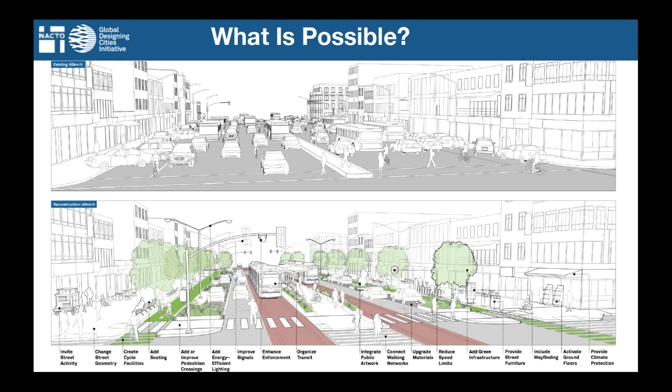But what's even more critical is that we challenge the spaces we already have and that we demand more of that space to serve more of our population.

Instead of taking a functional classification approach to our streets, where we basically choose if we have an arterial or a connector or a local street, instead we take a people and place approach to street design in the Global Street Design Guide.

We demand that every street design look at the desirable outcomes of proactively supporting healthy and safe environments, of livability and quality of life, of access for all modes of transportation, looking at how the designs support environmental and economic sustainability, and of course how we can do that in a fair and equitable way.

We have 10 core design principles in the Global Street Design Guide. We start, as I mentioned, with our most vulnerable. We make sure that our streets are safe and that they must promote healthy environments.

We remind ourselves that our streets are public space. They're public space. That means they belong to all of us and we all have a right to be there.

Our street designs play a fundamental role in the ecosystems of our cities, that they must be multimodal and make sense for the context that they're situated in.

We know now more and more evidence that great street designs support great businesses. And we have to remember that we don't experience our streets in plan or section like we often see them in drawings, but as human beings we experience them in real time with all of our human senses.

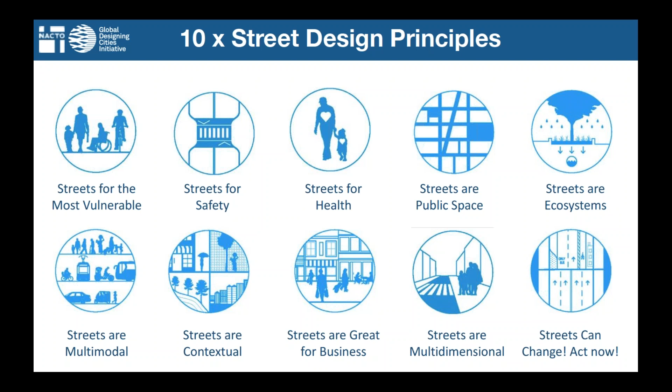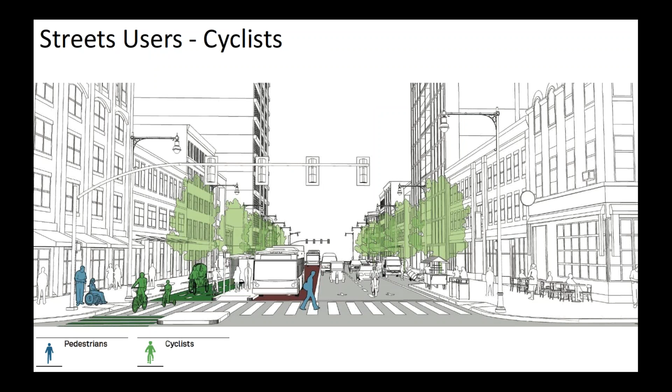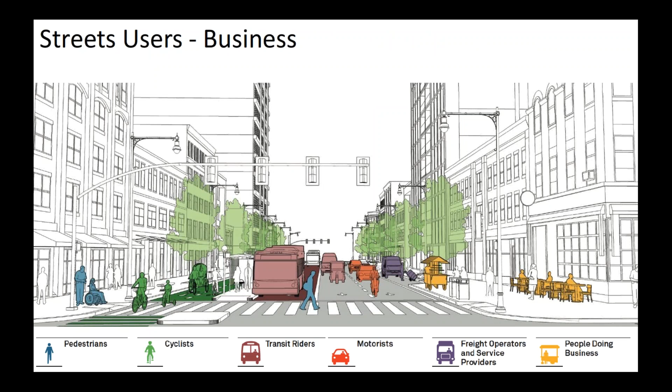When we look at designing for people, the Global Street Design Guide breaks down the needs of all the different users, from pedestrians and cyclists to transit riders and private motorists, to those operating freight and moving goods and delivering city services, and as we mentioned, for people doing business.

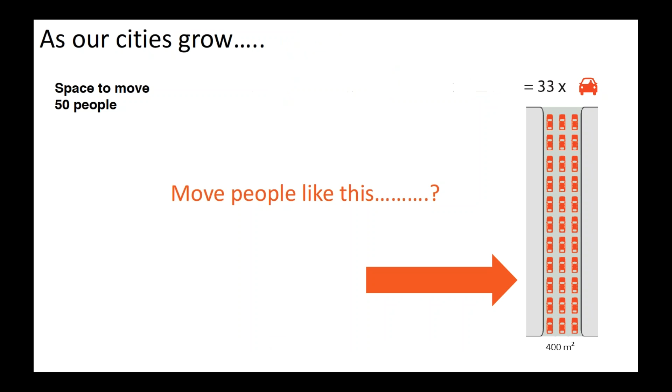Most of you have probably seen diagrams like this, where we look at the amount of space taken to move 50 people. And as our cities are growing and expanding, we have to ask ourselves, do we want to move 50 people like this, or do we want to move them in a multimodal approach?

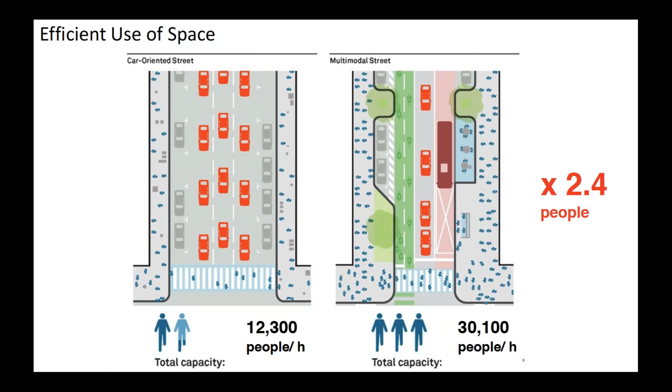One of the diagrams in the Global Street Design Guide shows the very same space designed two ways: one for a car-oriented street moving around 12,000 people an hour, or as a multimodal street where we can move almost 2.5 times as many people in that same space. So it's very logical, the numbers all align, that we really have to make more efficient use of our street space.

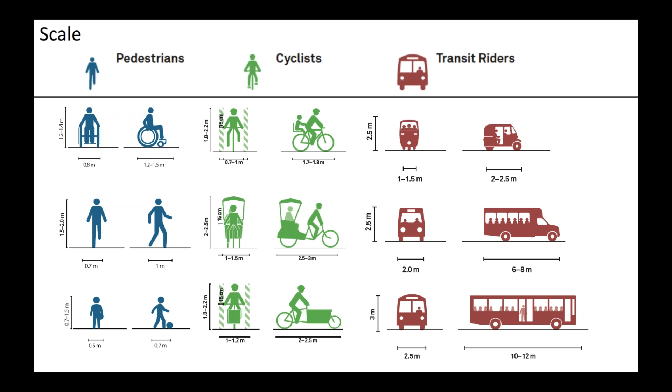So the Global Guide, I'll just go quickly to give you a taste of what's in there. We touch on the scale of all our different users and have the person in the wheelchair as our design vehicle for our streets, not the vehicle moving the private car.

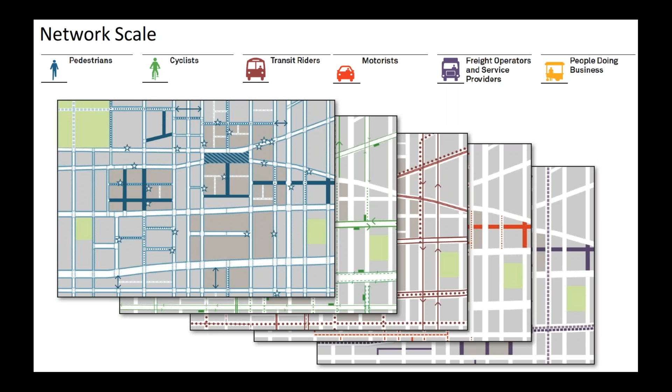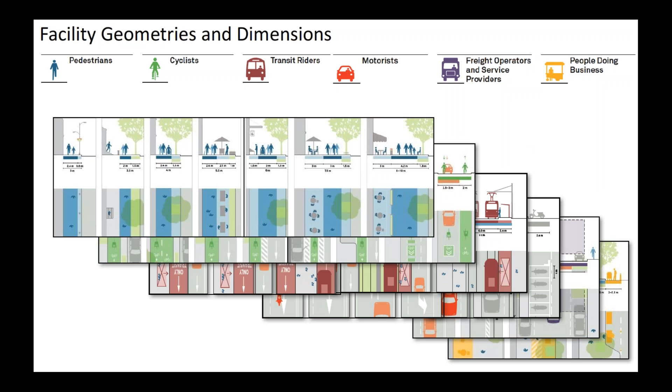We take each of these sizes, but we also look at the larger scale: what does it mean to create a continuous, safe, and comprehensive network for each of these users, making sure they're comfortable and have access to the city. We look at the different facility geometries and basic dimensions for each user, and break down what makes sense for different parts of the city in different contexts.

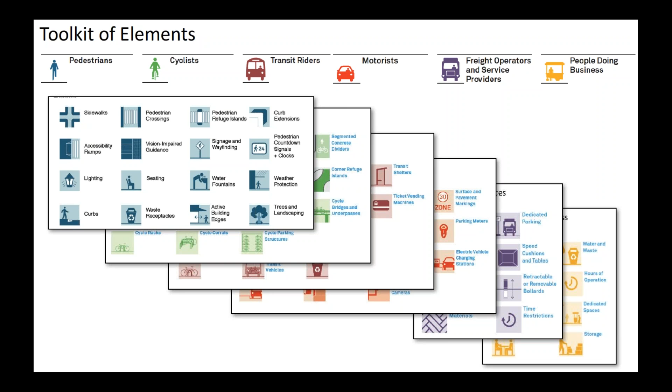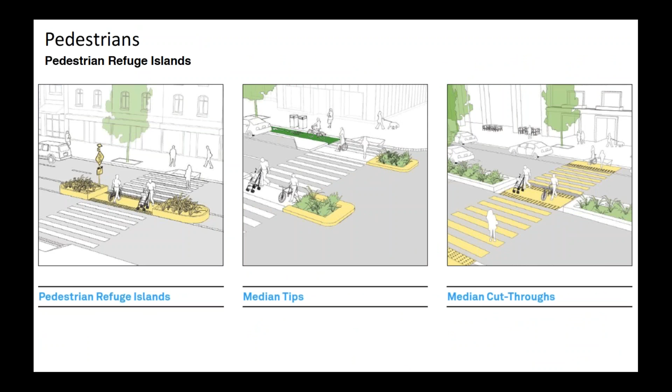Beyond this, it's not just one piece of infrastructure, but a whole toolkit of elements that need to be provided for each of these users to create a comprehensive, enjoyable, and safe experience. The Global Guide also touches on other pedestrian infrastructure, like crossings, refuge islands, and curb extensions, thinking about how we can reuse space and shift it from one user to another.

When we talk about designing for place, it's critical we think not only about the built environment, but also the natural context we're working in, the local social and cultural context, and the economic environment that informs each and every design.

The Global Guide has a series of regional context considerations, from looking at demographics and density to the larger street networks and block sizes, making sure we take into consideration geographical features and vulnerability to natural disasters.

Then we look at the immediate context: what's the detail of the street activity at each stretch or block? Where should the street furniture go? How do we maintain a human scale within the right-of-way? And how do we think about the edges of our buildings so they're transparent and have frequent entrances to keep active, safe, and engaging environments?

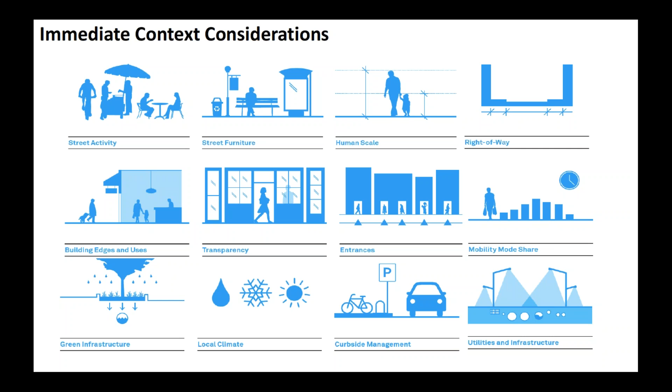How do we think about the local climate and opportunities for green infrastructure in each and every street? It's fundamental that we remind ourselves that we can't just have one street design and apply it along an entire corridor. As the context changes, so must our designs.

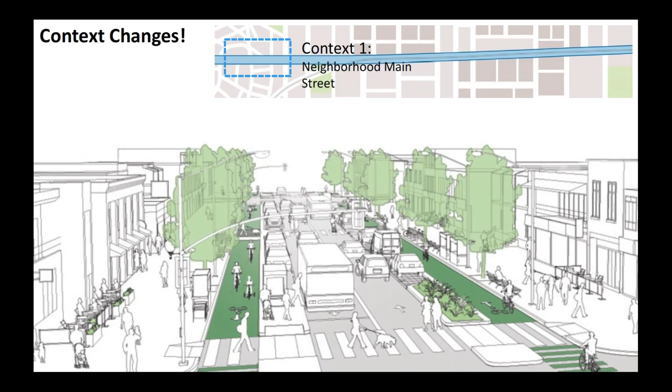So we see an example here where one street is like a neighborhood main street, but a few blocks down the road, maybe a new transit system has entered the network. The density has changed and the land use has changed, putting different demands on the street and therefore demanding different design decisions to reflect that.

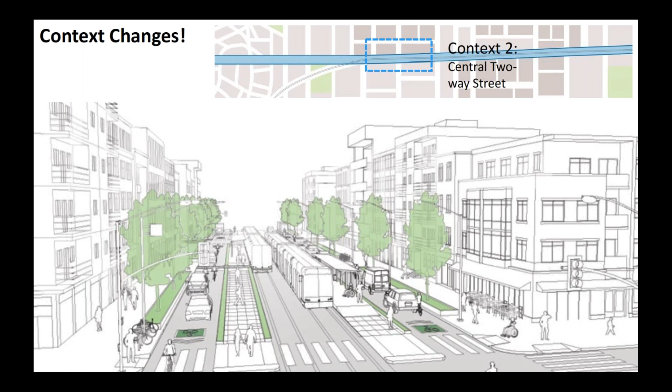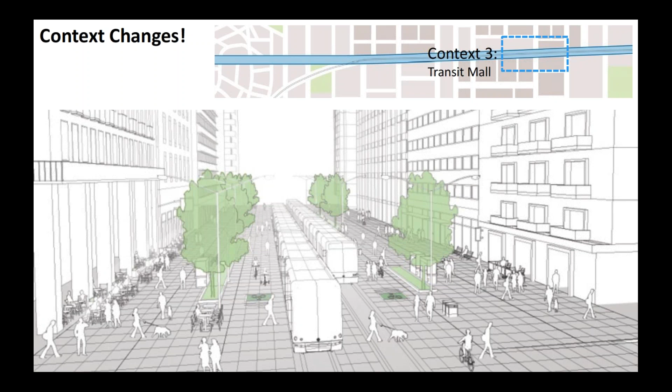A few blocks further down, in this case in a dense urban area, we see the same space transformed into a transit mall, with dense areas, a lot of people, and high volumes of pedestrians putting the need for that space to prioritize transit and people.

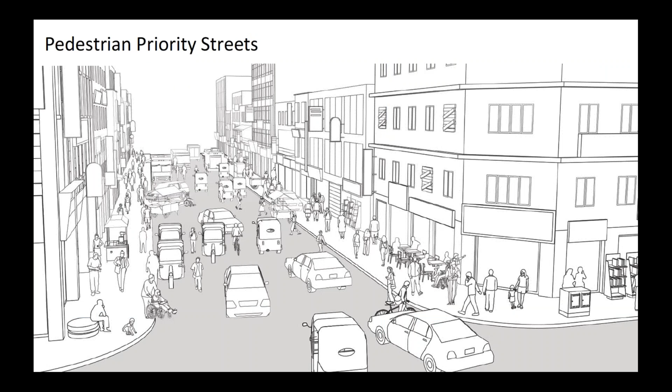A big part, as I mentioned, is around street transformations in the Global Street Design Guide. There's almost an infinite number of street typologies, but we focus on 5 key types: pedestrian priority and shared streets, neighborhood streets, large streets, and then of course the things that don't quite fit, which we put in special conditions. We've taken examples from our network all around the world and abstracted these into 3-dimensional models.

We take the types of conditions we find every day, where sidewalks are blocked and chaotic street environments make it unsafe and unpleasant for people, and show what's possible and how these can be transformed, like this example of a pedestrian priority street.

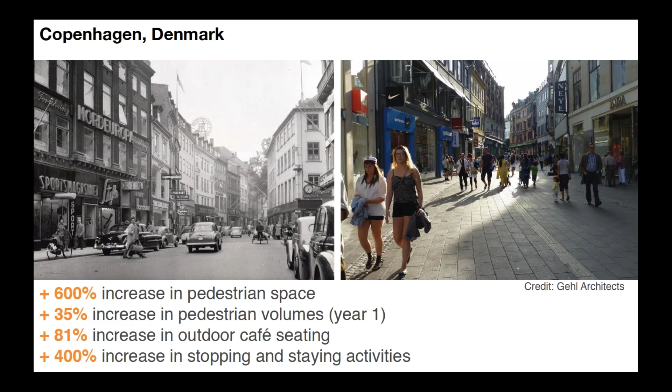Similar to the example we heard this morning from Copenhagen, we also collect metrics from real-life case studies. Here we show a huge increase of pedestrian space and pedestrian volumes, and in turn a huge improvement in the amount of space for stopping and staying activities, as well as outdoor cafe seating.

Kind of similar to this one in New York City, where this transformation with the addition of protected cycle infrastructure saw not only a decrease in injuries but in pedestrian crashes, a decrease in overall speeding, and at the same time a huge increase, 49%, in retail sales.

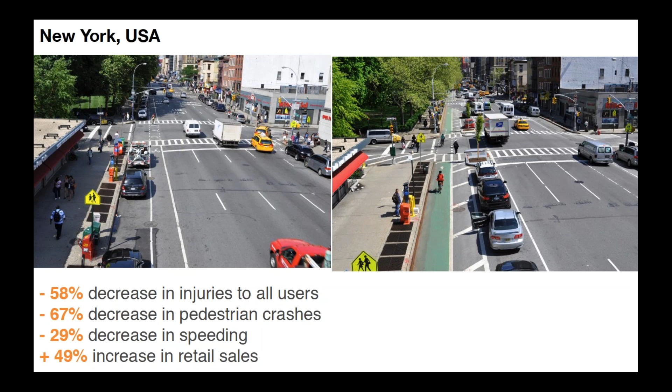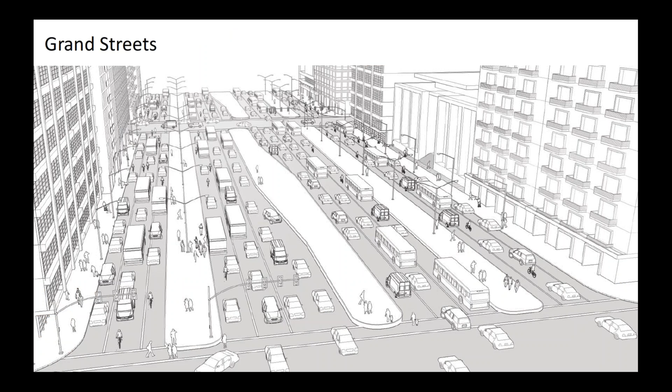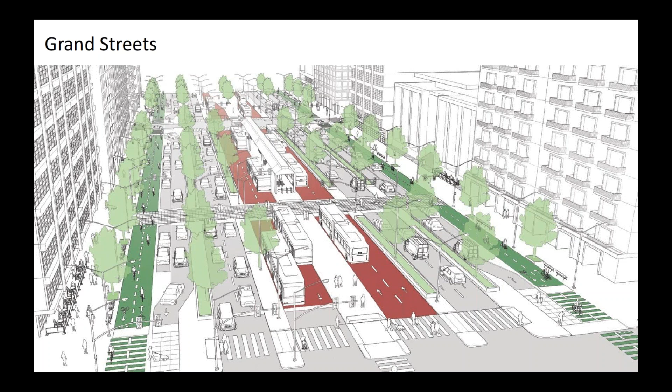And then large, grand streets like this one, modeled off an example from one of our case studies in Argentina, where we show how this can be transformed to much more efficiently move people safely, with dedicated space for cyclists, multiple lanes, and BRT in this case moving in each direction, yet with at-grade crossings for people to safely connect from one side to the other.

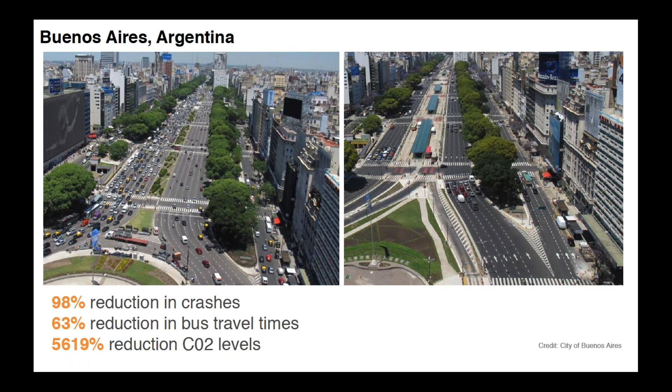And here in Buenos Aires, we saw this one example with an almost 100% reduction in crashes, a huge reduction in bus travel times and moving people more quickly, and a wonderful improvement in air quality.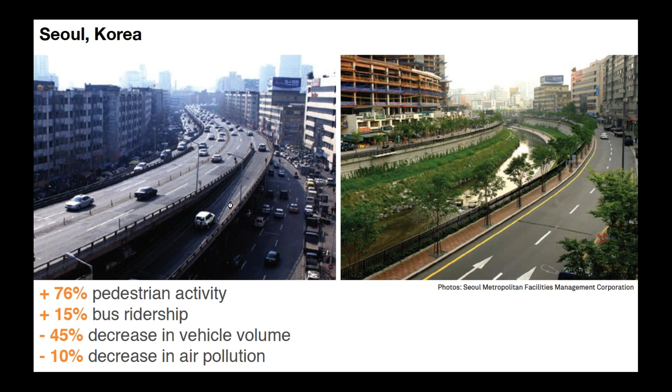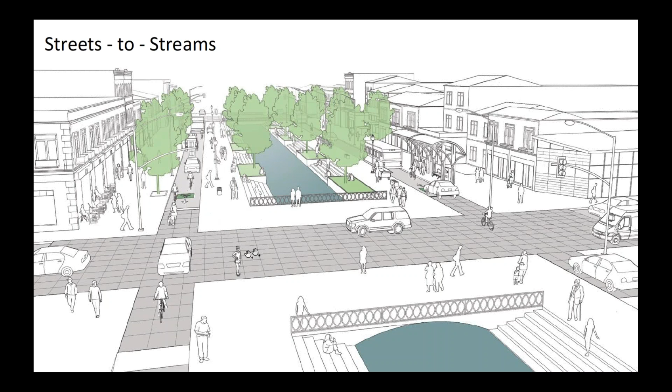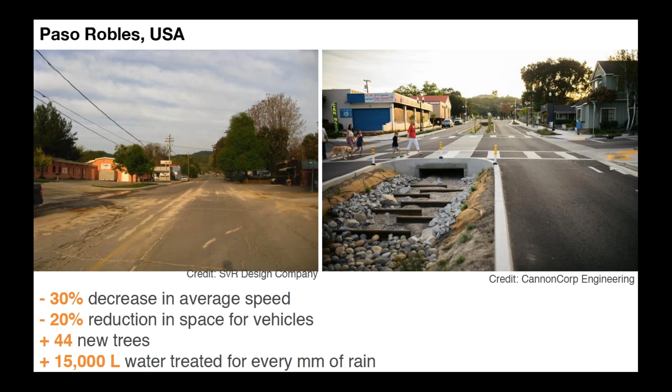So often we took complete disregard for our natural context and paved over our streams and rivers. Now with Streets to Streams, we're showing how these spaces can be unveiled or revealed to again provide a new heart to a community instead of dividing them. A bit like in Paso Robles, California, where we not only saw a decrease in average speed, but new trees helped to improve water treatment.

We have a chapter on intersection transformation showing examples where raised intersections can be added to slow vehicles and provide at-grade, safe, accessible crossings for people in the street, a bit like they've been doing in Fortaleza in Brazil just this past year, with this one showing a mid-block crossing.

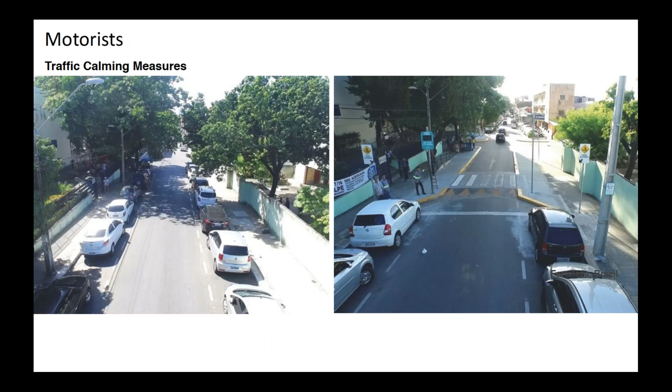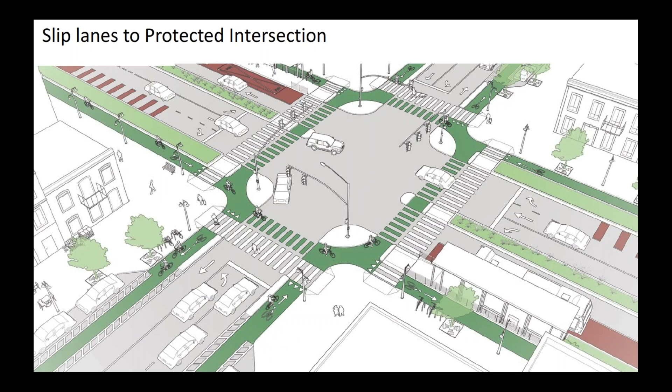Or how slip lanes that invite vehicles to move at fast speeds can be redesigned to provide protected areas for cyclists and more space for safe crossings, green infrastructure, and transit facilities, a little like has been tested in this example in India, with cones and chalk where the space can be rethought and tested.

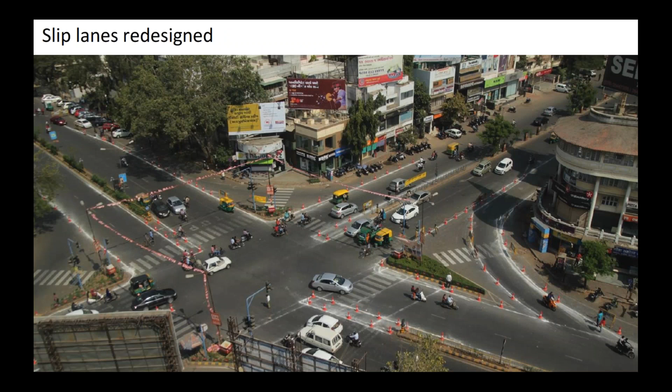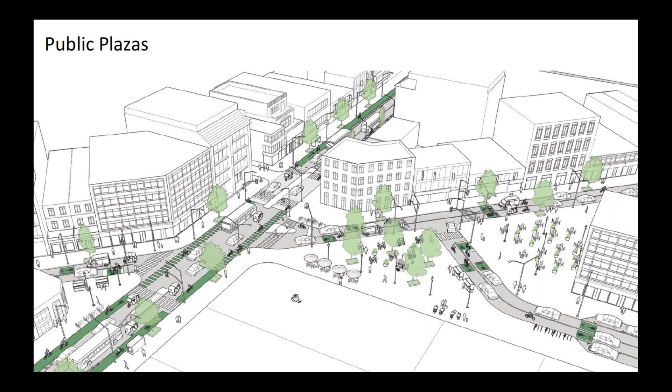And one of our favorites, public plazas, where we see geometries coming together at crazy angles, and underutilized space that's being used to store cars rethought and transformed into places for people, drawing from examples in Buenos Aires, Argentina, to New York City, where we see car parks transformed into plazas.

And of course, one of the most famous ones, Times Square, where the closure of one of the busiest intersections in the world saw an increase in ridership for buses, with almost three-quarters of people preferring this. We saw an overall reduction in crashes and, once again not surprisingly, an improvement in air quality.

Now, there are over 20 case studies from all around the world in the Global Street Design Guide that we invite you to take a look at.

We also touch briefly on process and metrics, understanding that people have a different role to play at different parts of the process. So we touch on everything from engaging stakeholders and analyzing the site, through project implementation, to make sure we're looking at ongoing maintenance and management, evaluating the impacts, and constantly looking at how we can update our policies.

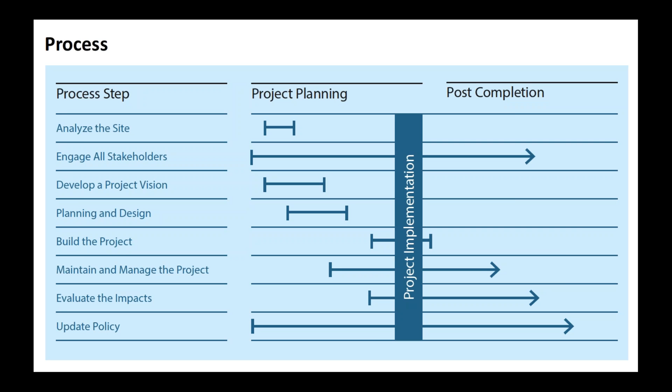We look at who's involved in shaping streets and how we get the right people to the table, identifying what each of these stakeholders care about, what their interests are, and how we can work them all in together. And when we talk about measuring and evaluating the street, we have three primary areas: we look at the physical and operational changes of our street.

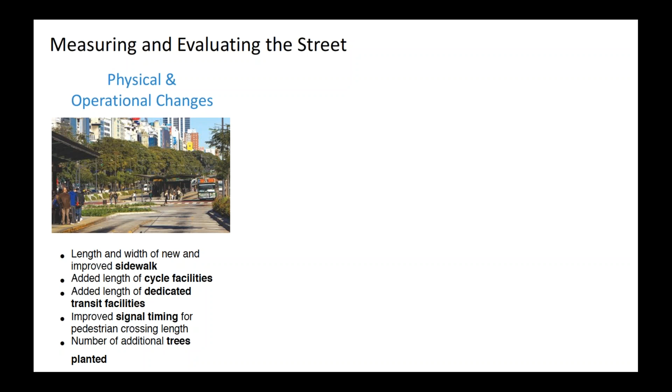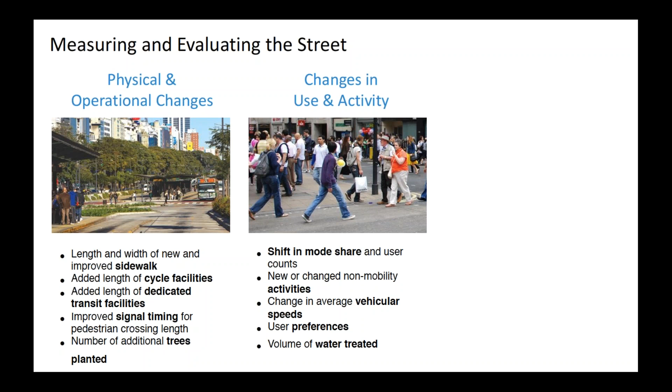So can we add new sidewalks or new cycle facilities? Can we improve the signal timing for a crossing or add new trees? And how do these physical and operational changes have an impact on how people use the street or the activity that occurs there? We need to measure: if we add more cycle facilities, are we getting more cyclists? If we widen the sidewalks, are we having less people walk in the roadbed in an unsafe manner? And of course, the long-term resulting impacts of making sure we're working towards better air quality, fewer deaths on our streets, and overall healthy environments.

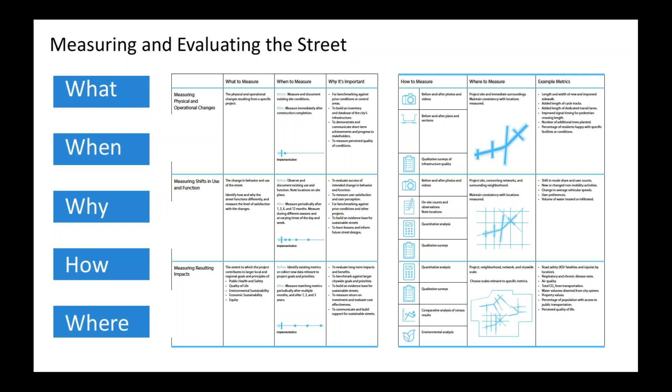The Global Street Design Guide touches on the what, the when, the why, the how, and the where, to help people measure these for the projects they're working on in their corner of the world. At the same time, we're developing metrics and sheets that will eventually be on our website, so people can take these and use them to measure the projects they're working on.

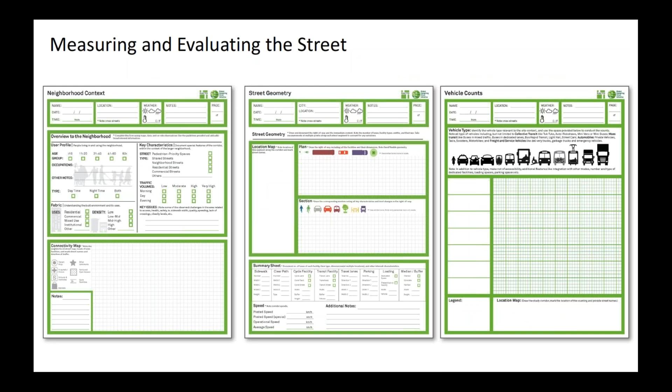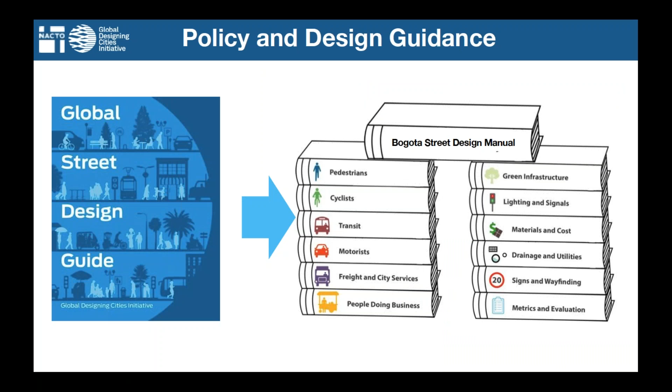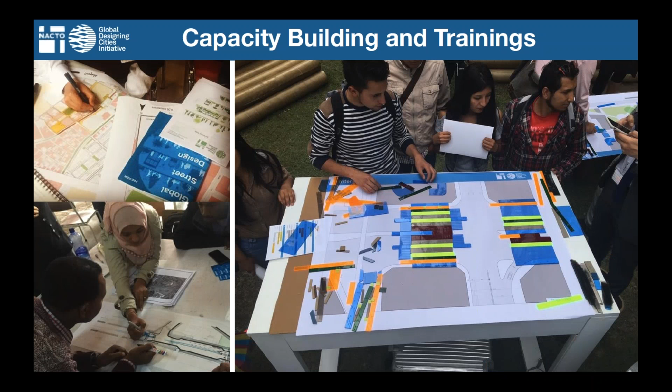To give you a tiny taste of how we're applying some of these strategies in the 3 cities we're working in, we're now using the Global Street Design Guide to inform policy and design guidance at the highest level in city governments. We're trying to make sure local staff in these contexts can come to trainings and build capacity in the local staff and the consulting and academic institutions, whether that's through a traditional presentation space or more hands-on with puzzle pieces.

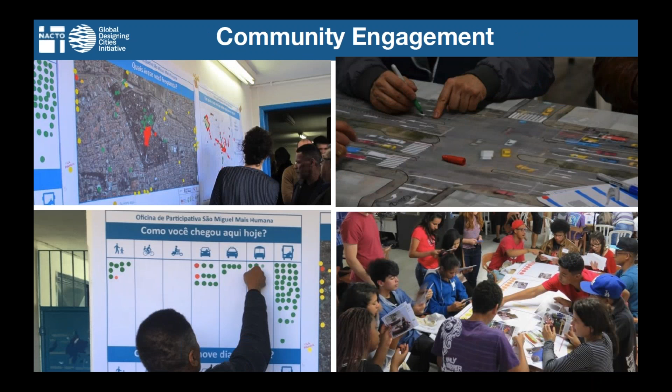We do community engagement, knowing that the locals, the residents in a neighborhood, are the experts of that space. We want to know from them how they move about, where they feel safe, and which strategies they think make sense for them. So this is a big part of the work we're doing on the ground.

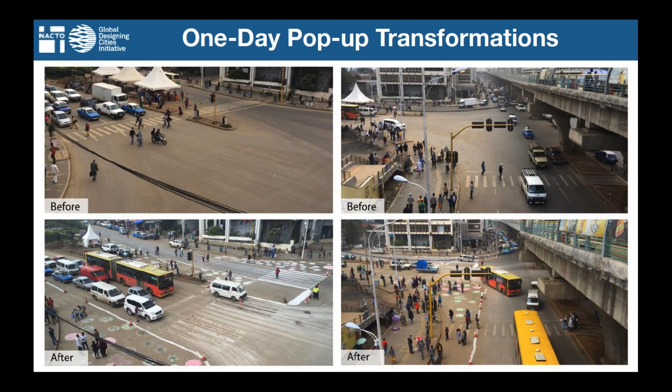We're doing one-day pop-up transformations that help people look, see, and feel a different alternative for the streets that they may have never had the chance to previously imagine. This one in São Paulo, Brazil, or here in Addis Ababa, Ethiopia, where we went out and used chalk and planters, and in one day were able to take the chief engineer and show him that a bus could still make that turn, and it was okay to reclaim those corners, to shorten the crossings, and to give them back to pedestrians.

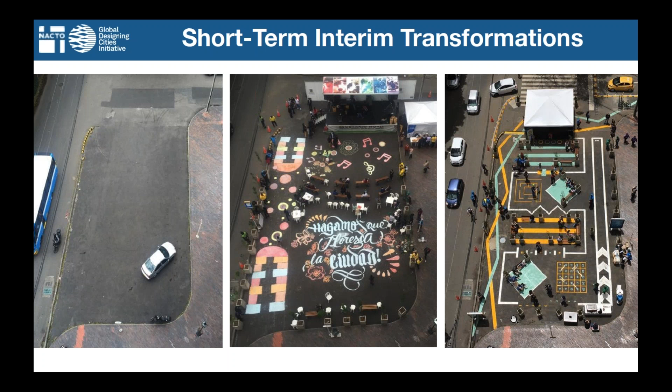And sometimes these pop-up events help us work towards longer-term interim transformations. Here, a plaza in Bogotá, where a car park was transformed in one day with a local artist and performance. Then we collected metrics, and went back and did this with the city of Bogotá in paint. So it's now there for 6 months, and we're measuring the impact of it.

And we've just done the same thing with the chalk project you saw in Addis Ababa—we went back last weekend actually. A week ago today we launched this in Ethiopia, where we worked with a local arts college, and we redefined and redesigned this large swath of asphalt into a more pedestrian and human-friendly space.

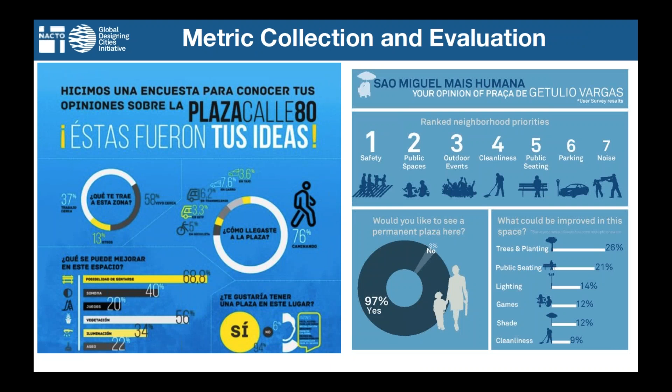And as I mentioned, we're collecting metrics and evaluating these, taking the outcome of these projects to understand what works and what doesn't, and to make sure we're improving our ideas and our designs along the way.

So we officially launched this new resource, this new baseline for designing streets around the world, last month in Quito at Habitat 3, and we're now embarking on an endorsement campaign for cities and organizations around the world. So please reach out to us if you're interested.

We've had a wonderful time so far. Sorry, I've lost the presentation.

We've already had advanced praise from many wonderful leaders in the industry, and many of the mayors here, from ex-New York to Paris and Rio to Mexico City, to Sydney, and to Santiago.

So we hope that this new resource provides the tools for you to reimagine, reinvent, and redesign safer and more sustainable streets in your context.

Our challenge to you is to write about it, to ask for it, to demand it, and of course design it. For those of you that have the money, please fund it, and ultimately just do it, to fight for streets that put people first.

And so collectively, we can each work towards changing streets to change the world. So thank you.

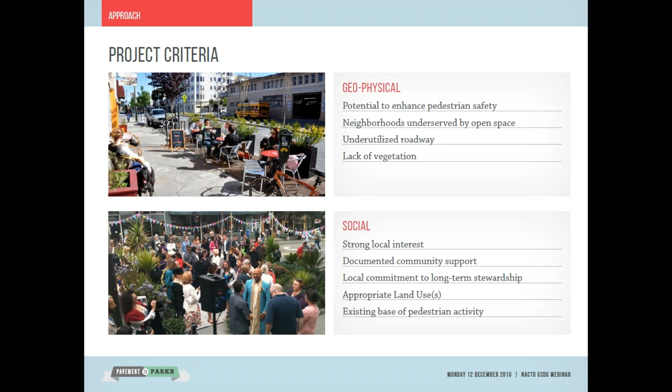We are happily, I think, overwhelmed with requests, so this also helps us be really focused and strategic about where we can make the most impact and have the most change.

So we would like to illustrate briefly a couple of examples of work.

The first project, which is actually included in the design guidelines, is Persia Triangle. This is a project we decided to work on in the Excelsior neighborhood, a pretty diverse neighborhood in San Francisco along one big transit corridor, Mission Street. The triangle is a triangular area where three streets intersect: Mission, a very high transit and commercial corridor, and two smaller streets, Ocean and Persia.

This project started a few years ago, in 2013, and we began meeting with the neighborhood. The neighborhood approached us together with the office of the district supervisor, John Avalos. We were asked to look at this corner, which from just a superficial look seems like a nondescript corner with a big car repair lot in the middle of it. We would never have considered it if the community hadn't approached us to request that we look at it.

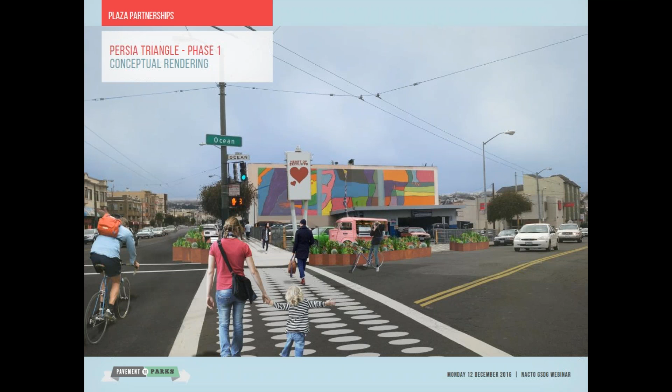I'll leave time for questions at the end, but we'll move on to the second case study now. Great, thanks Ilaria. We'll quickly cover another overlooked and underutilized place—or formerly underutilized and formerly overlooked place.

This is Annie Alley Plaza. Annie is one of the tertiary alleys we have throughout our downtown, so it's a very different land use context than Persia, which we just looked at. That was in one of our more outer neighborhoods, a bit more of a suburban condition, whereas this is right in the heart of downtown.

It's in Supervisorial District 6, which has the lowest per capita open space of any district in the entire city.

This is what Annie Alley looked like for many years—one of those back alleys you'd find in any downtown in North America and many places in Europe. We have a tiny pedestrian facility; 90% of the right-of-way is given over to vehicular circulation. This photo was taken in the mid-afternoon, and it's not even well used by cars, since peak usage by private automobiles really only happens in the morning and evening.

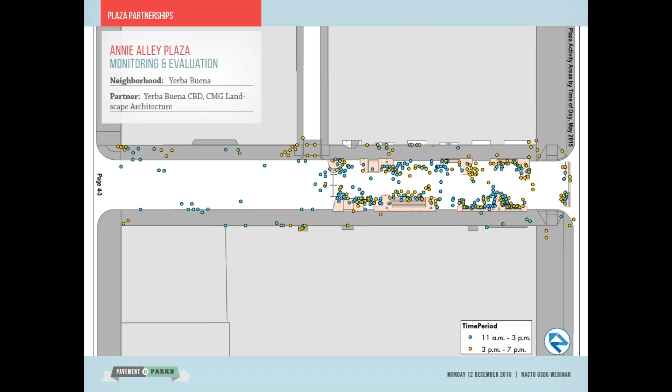And so we were really happy and pleased with this as a demonstration project for San Francisco, and a temporary intervention for making change in our streets.

We just wanted to touch on a little bit some of the types of analysis and observation and evaluation work that we do. Part of Pavement to Parks as a program is something that we call the Pavement to Parks Research Lab, which is a whole venue for independent researchers, either from academia or resident interns that we have here at Planning, to conduct evaluation and research work on our projects and our program.

So we had a great resident intern here for a year, Jean Stroman, who did an extensive study of this space, adapting a lot of the methodologies that William Whyte and Gehl Architects have used over the years to just really understand where people were over the time of day, what kinds of activities they were engaged in, what kind of postures they were taking, how they were engaging with the fixtures that were provisioned.

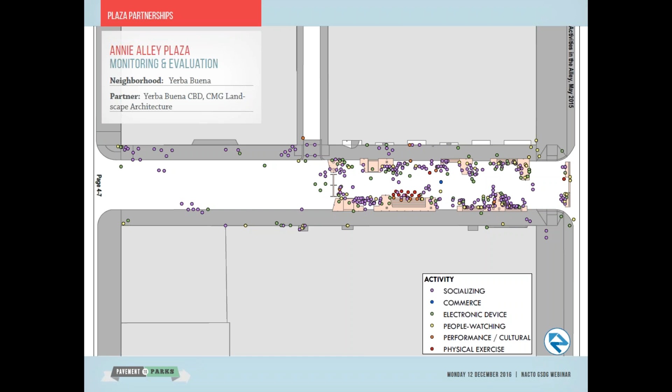And this is really helping us think through the potential next phase of Annie Alley. This installation, as you've seen it today, was actually de-installed this past fall. The Community Benefit District is reconsidering when in the near future they might do another version of the installation, learning from what we learned during its two-year life cycle.

I just wanted to note that Pavement to Parks helps to facilitate temporary public spaces, experimental public spaces, and sometimes, not often, those spaces are, in the case of Annie, de-installed for a time or reconfigured. And that's part of the strength of this approach, I think, in that the investments that are made, the demonstrations that we do, can also be context responsive and situationally responsive.

So for example, you'll see here just in this diagram that the Jessie Square Garage, which is a huge parking facility some blocks away, actually had some of their exits closed to facilitate the construction of a museum. The local Mexican museum is currently under construction on that block.

As a consequence, there's only one way now that patrons can exit that facility, and that meant that in order to alleviate some of the drastic impacts, it was part of the rationale for Annie, this version of the installation, being removed for a time.

This particular alley is actually being looked at as part of a larger environmental impact report, an EIR, for the larger district as part of our Central SOMA plan. It's one of the many tertiary streets that are identified for closure and being analyzed through an environmental lens for their potential long-term impact were they to be closed.

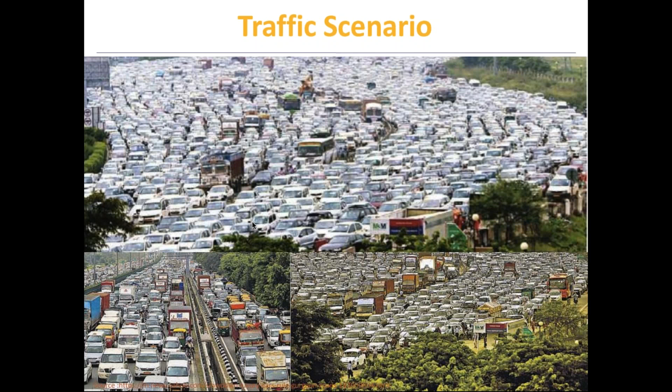Thanks, Amit. I think our previous presenters have already said why we need this concept, and why we need to design the streets for all. So this is Indian streets - basically this is Gurgaon, where we have this 16-lane wide road, and this is the everyday traffic scenario, which is full of cars.

And road safety - as already described, with the statistics about it - India is number 1 in road fatality. 0.14 million people die every year on Indian streets, and 70% of them are pedestrians and cyclists. So basically, we started this whole Raahgiri to reclaim the streets for pedestrians and cyclists, ensuring their safety and taking this message to the decision makers about why they are important in the streets.

Then moving to air quality - everybody knows India is number 1 in bad air quality, and we have 0.62 million premature deaths every year due to bad air quality. And this bad air quality is just because we are planning and designing our streets in a basically car-oriented way for our cities.

Physical inactiveness causes 0.43 million premature deaths every year, just because of the car-oriented culture we have adopted, sitting in the car, going to office and coming back. There is no physical activity because of a lack of public transport and no infrastructure for pedestrians and cyclists. So even people willing to walk or cycle can't. As the famous statement goes, building flyovers or widening roads to solve traffic congestion is like loosening your belt to fight obesity. We all have to go on a diet, from designing streets for cars only, to dieting from cars.

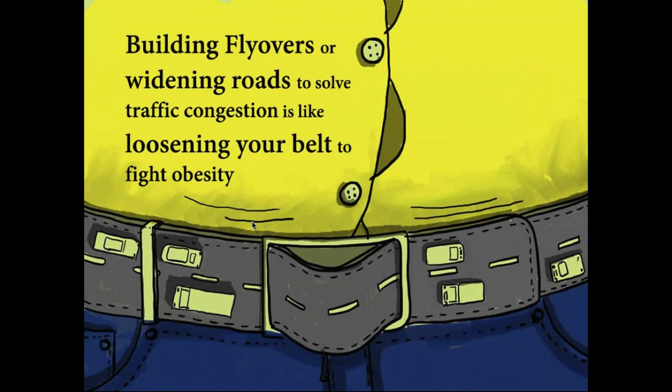The whole agenda behind it: whenever we talked about cyclist and pedestrian safety, decision makers say, who cycles or walks? Everybody here has cars, so we have to design our streets for cars. So we said, okay, why not take a bottom-up approach and prove that people really want to cycle and walk. In Gurgaon, 33% of people who walk or cycle are basically from the underprivileged section. But after Raahgiri, it was proven that elite and middle class people in the city also want to walk and cycle if we provide safe infrastructure for them.

This is Gurgaon. It's basically a suburb of Delhi with a million plus population, and it's an IT hub where most of the people are from other parts of the country who came here and set up this city. This is basically in Haryana state.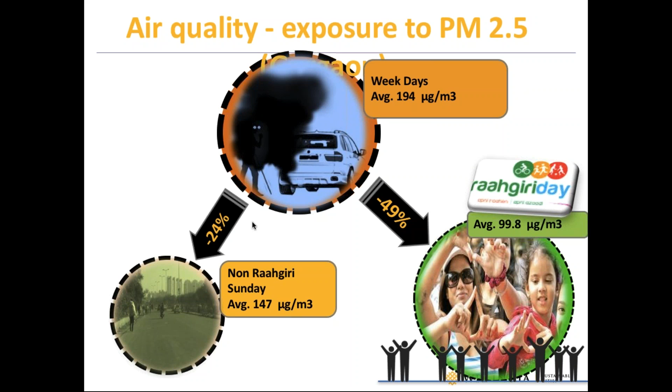Air quality, which we monitor where Raahgiri happens, decreases by 49% on average compared to other days. So if you actually reduce car use in the city, it improves air quality. And there are a lot of campaigns focusing on universal accessibility.

There was one event dedicated to disabled people, where the disabled people and the common man came together and had lots of street activities, like blindfold football, cricket, and other things.

Then engaging community - this is what San Francisco is doing, and we started doing this kind of stuff in Gurgaon and other cities too: painting zebra crossings, reclaiming parking areas and converting them into public places. And we can see the drastic changes.

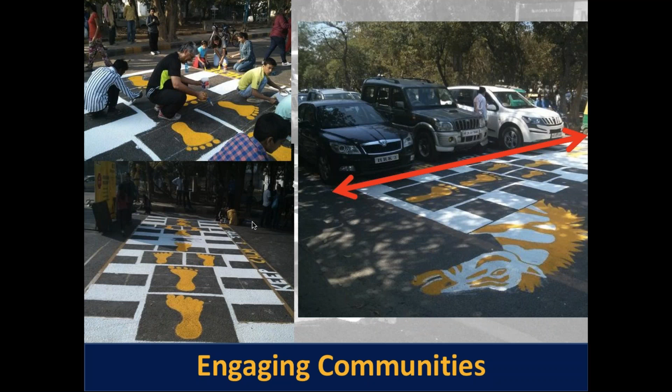The cars who were not stopping before the zebra crossing started stopping before it. And our Prime Minister himself said, why not we observe Sundays as a cycle day, with people cycling or walking or enjoying the street without fear of getting hit by a car.

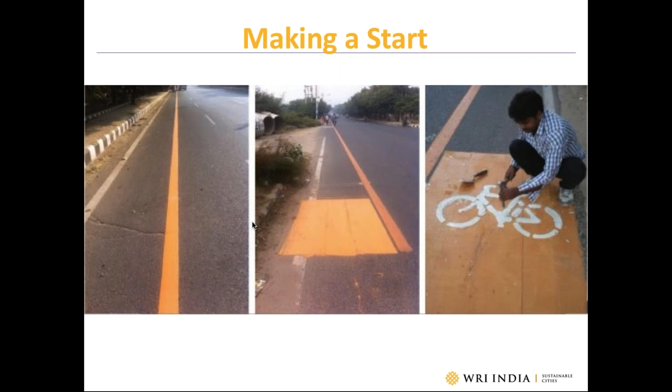So these are a few initiatives that have been taken, and there are many more examples. A lot of cities are coming up with public bicycle sharing systems, and a lot of cities have started constructing cycle tracks.

There's a lot which WRI is advocating in most of the smart cities. We are working with 10 smart cities who already do Raahgiri Day and are transforming their streets into public spaces. This is some street design coming up in Bhopal, Bhubaneswar, Gurgaon, and other cities, and there are 5-6 cities that have started public bicycle sharing systems.

So a lot of changes are happening through Raahgiri, because it's not just the administration - through Raahgiri, people are also sensitized towards why we need to design our streets for people and not just for cars. So here I will end my presentation, and thank you so much for providing this platform to present our case study from India.

Thank you, Sarika, and thank you, Amit. It's amazing to see this case study every time I've heard about it, and the effort you've made, especially in the Indian context, which is still very car dominating. I actually lived in Gurgaon, so I know exactly the situation there.

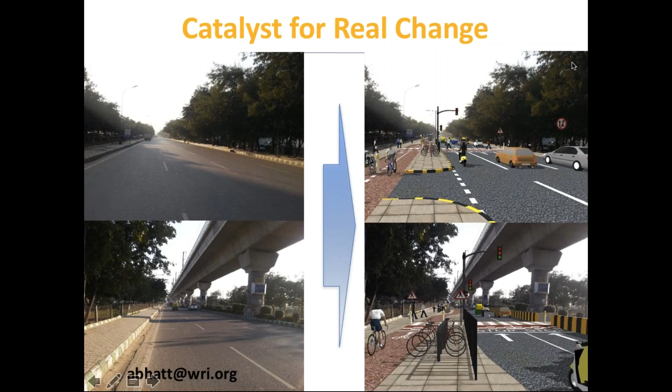Meanwhile, while you formulate your questions, I have a question for Robin, Ilaria, Amit and Sarika - during these projects you presented, which were some of the groups that were most challenging to convince? In both projects we've seen a level of community engagement - what were some of the challenges you faced during that engagement, how long did it last, and what were your key takeaways from that process?

Do you guys want to go first? We could talk ad nauseam about this, so we'll let our partners in India begin.

Sure, yeah, I think it's a very good question. To me, one of the major stakeholders that were very difficult to convince were the shop owners, because in the Gurgaon Raahgiri route there are multiple markets and these shops open early morning, and they believed that if you restrict motor vehicles, their business will go down.

What we tried to tell them is that it's not the motor vehicle which shops, it's the people who shop - if there are more people on the streets, walking, cycling, with slower speeds, there will be a much greater propensity for them to buy. Initially they were very reluctant, but after a couple of events they saw the value, and from being a stakeholder group totally opposing the idea, they really became champions for it and helped the concept grow further.